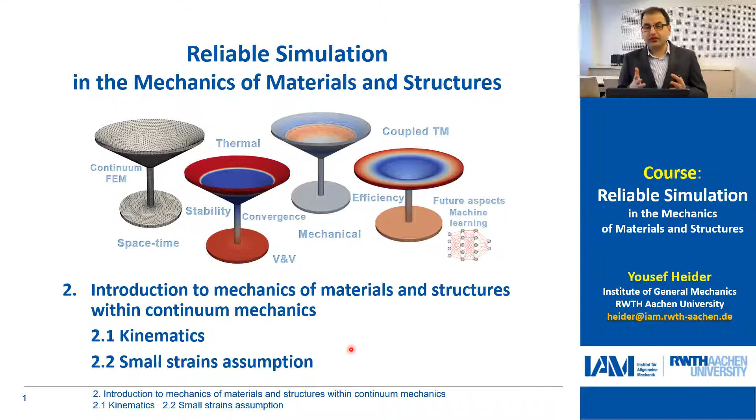Today we will talk about kinematics and the small strains assumption, and see its effect on the reliability of our numerical model.

Let me start with some general topics. In engineering, many problems can be modeled or treated on different scales. This depends on many factors, like what kind of materials we are dealing with, what kind of structure, how big the structure is, what computational capacity we have, and also our experience.

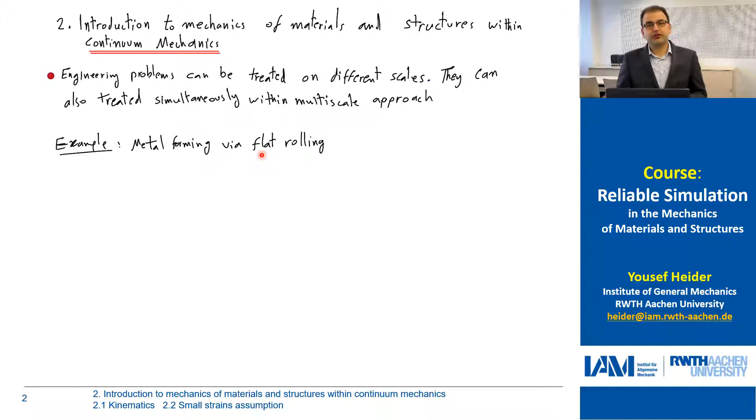Let's take, for instance, metal forming via flat rolling. In this example, we have a metal block or metal sheet subjected to rolling. If we look at this material on different scales, for instance at the atomic scale, we can see the atomic structure of this material.

We can model this problem on the nanoscale using molecular dynamics. However, this is almost impossible for large samples, maybe a few millimeters to a few centimeters, because then we have to deal with tens of millions of degrees of freedom, and even supercomputers cannot do these simulations efficiently.

Now if we move to a higher scale, for instance the micro scale, we have to consider the granular structure of our materials and the boundaries between these grains. Many researchers go for micro models because it gives very good results, close to the physics of the material.

However, it also has a problem with computational cost, because if we have a bigger problem, we have to deal with millions of grains, and this is not possible.

So if we have a sheet of metal or a problem with dimensions of a few centimeters to a few meters, we have to go for a higher scale, a continuum mechanical model, where we don't care about the micro or atomic structure of our materials, but deal with a homogenized medium.

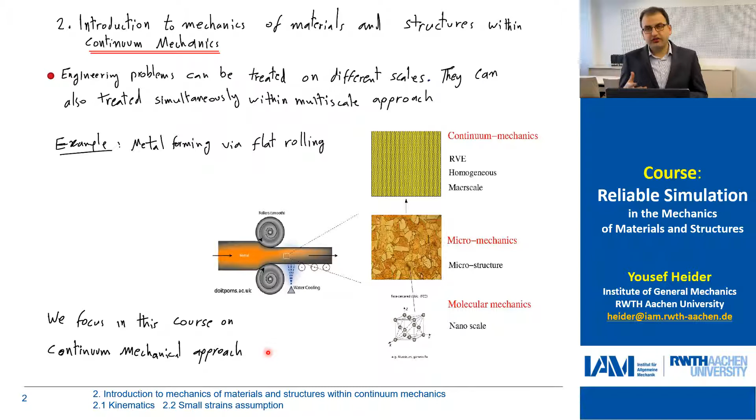In this course, we will focus on the continuum mechanical approach and the challenges and numerical aspects related to such models. So let me give you the basic notations, the way we write scalars, tensors, and so on.

If we see small letters like this one here, which have no underline and are not bold, they are scalar quantities. They could be material parameters, or any constants.

If we have vectors, vectorial quantities which are first order tensors, they have small letters with an underline below, and this is the vectorial quantity. If we have second order tensors like matrices of this form, we have the coefficients here, and here's a basis. In this case, these are second order tensors.

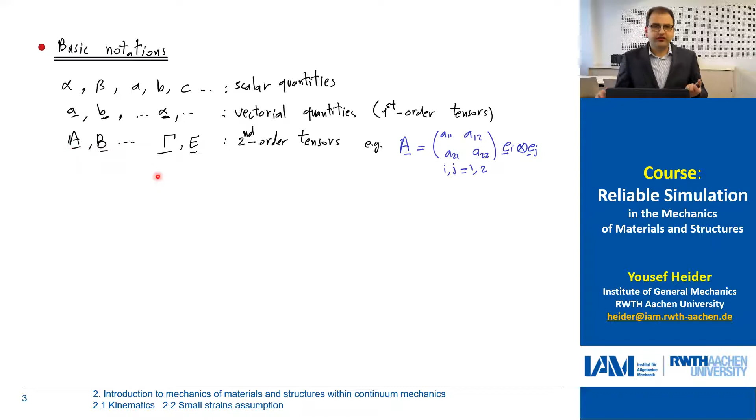For these kinds of tensorial quantities, we use capital letters with underline, and this is, as I said, second order. If we have higher order tensors, third order, fourth order, or even higher, we use capital letters with underline and write a number on top of the letter, which is the order of our tensor. So if n equals 4, for instance, this might be the elasticity tensor.

If n equals 2, then we have the second order tensor, so we don't write the 2 in this case, simply because most of the tensors we deal with are second order tensors, so we don't write it very often.

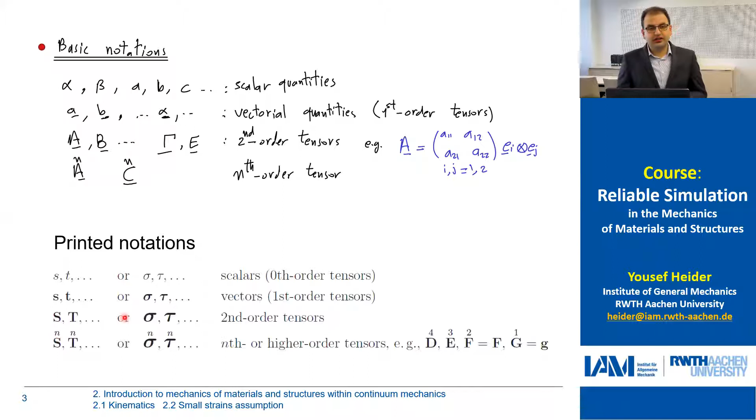If you take a printout or script from our group or institute, you will see these kinds of notations. The scalar quantity is similar to what we write by hand. For the vectorial or second order tensors, we don't write the underline, we use bold letters. This is possible on a computer, but by hand it would not be easy or possible.

So let's move on to the real topic. We will talk a little bit about kinematics. In this context, I am recalling some aspects you learned in the continuum mechanics course, and I will discuss different issues in connection with the reliability of the continuum model, which relies on these kinematic formulations.

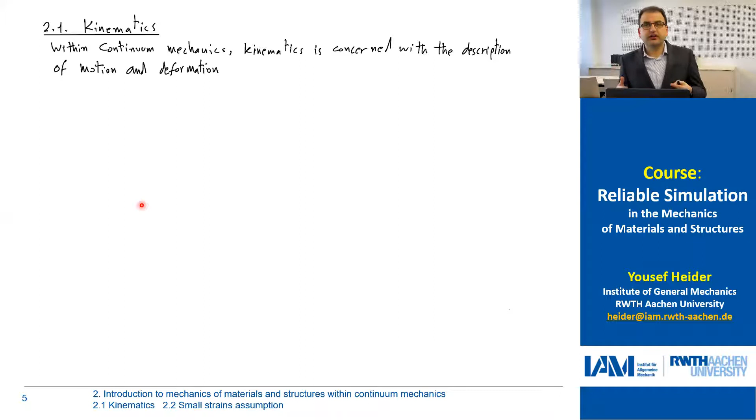We could have a line element, surface element, or volume element belonging to this reference configuration. And then after the deformation, so at time t, due to the application of F, we'll have rotations, we have translation, and we have deformation inside the material itself.

In this case, each material point P can follow its own motion function. We call this chi. It's a function of X, the position vector, and t, and it refers from the reference configuration to any current or deformed configuration, so that we have the position vector in the current configuration, which is small x.

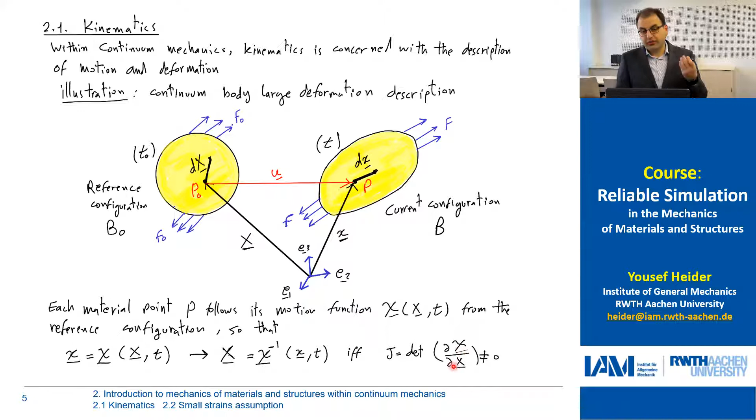It's a function of chi, and capital X is the position vector in the reference configuration. You can switch between the position vector in the current configuration and reference configuration through the inverse of chi. The Jacobian, the determinant of the partial derivative of chi with respect to capital X, should not equal 0. So small x and capital X refer to position vectors in the current and reference configurations, and these are our starting point.

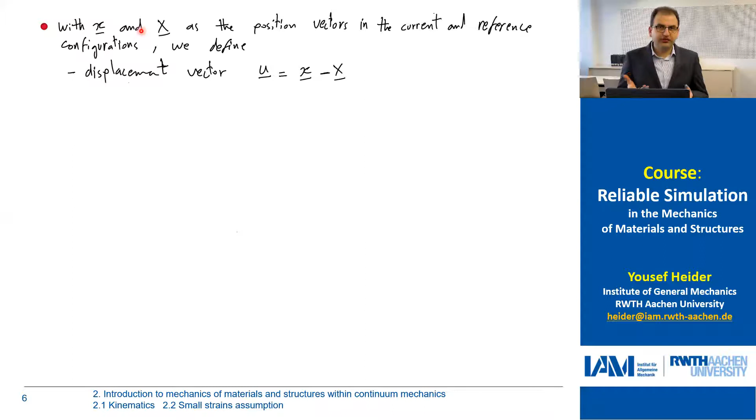Once we have this vector, we can define our displacement vector u, which is small x minus capital X. Then the velocity vector, which is the first time derivative, the partial derivative of u with respect to time. And then we have the acceleration vector, which is the second time derivative. These kinematic quantities will be needed later, for instance, to formulate the strain and the balance equations.

A very important and crucial quantity in the kinematic description is the material deformation gradient F. F can be defined as the partial derivative of small x with respect to capital X. And we have seen that small x is capital X plus displacement u. So by some reformulation, it will be identity plus gradient of u.

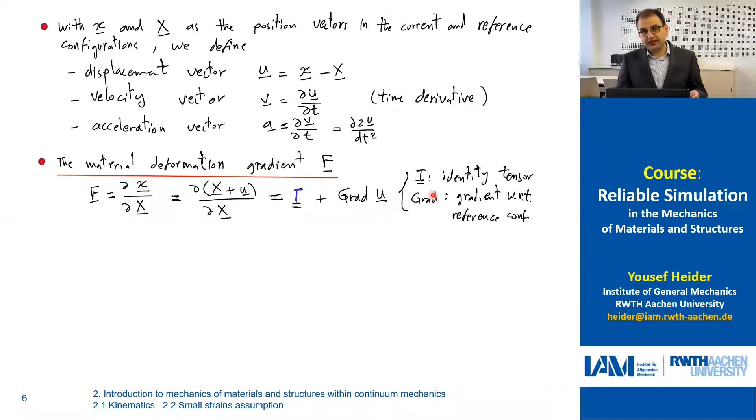I is the identity tensor, and this gradient has capital G because it refers to the reference configuration, so it's a gradient with respect to capital X. If we have another gradient with small g, referring to the current configuration, then we take small g. If we have an undeformed state, meaning u equals 0, apparently F would be equal to the identity tensor.

Now F includes all the information related to the rotation of our body, the transformation, and also the deformation inside the material itself. However, the rotations don't contribute to the strain. So if you have a certain body and just rotate it, rigid body rotation, there will be no strains or stresses inside this body. So we would like usually to get rid of these rotations in order to formulate our strain tensor.

Therefore, F can be split into a proper orthogonal rotation tensor R and a right or left stretch tensor, which includes the deformation inside the material. This right or material stretch tensor is called U because it refers to the reference configuration. And V is the left or spatial stretch tensor because it refers to the current configuration.

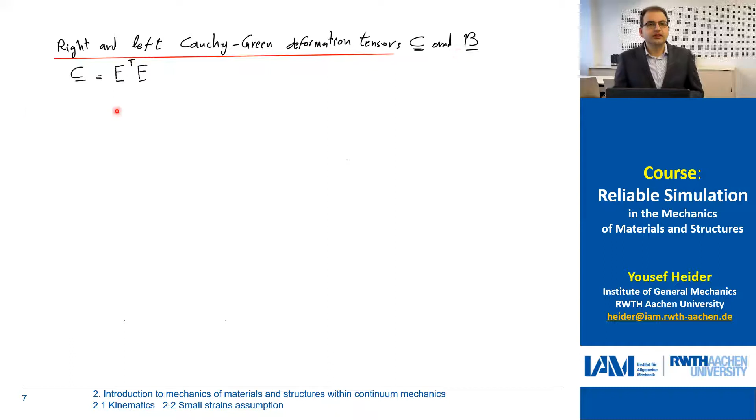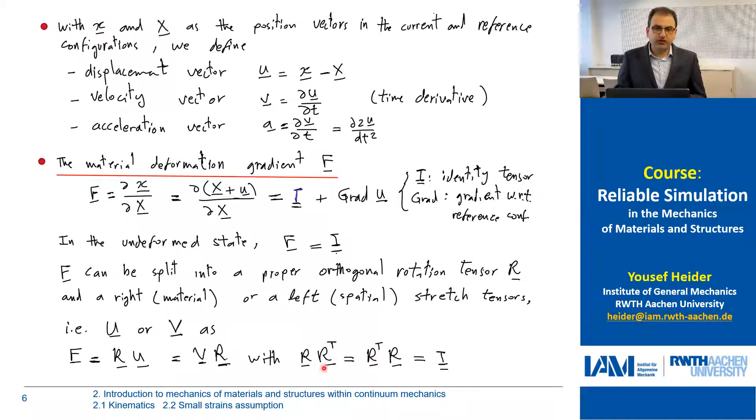First, let's go for the right and left Cauchy-Green deformation tensors C and B. C equals F transpose F, and we have seen that F transpose F will give us at some position R transpose R, or R transpose. So F transpose F would give us U multiplied by U because R will disappear here, and this equals U squared. This C, the right Cauchy-Green deformation tensor, is associated with the reference configuration.

The counterpart would be the left Cauchy-Green deformation tensor B, which is F F transpose in terms of V, and this is V squared, associated with the current configuration because it mainly includes the information of the current state of deformation, while the other one has information for the reference state. More details would be covered in the context of the continuum mechanics course, where we'll go into much more detail, but here I'm just recalling some information which will be used later.

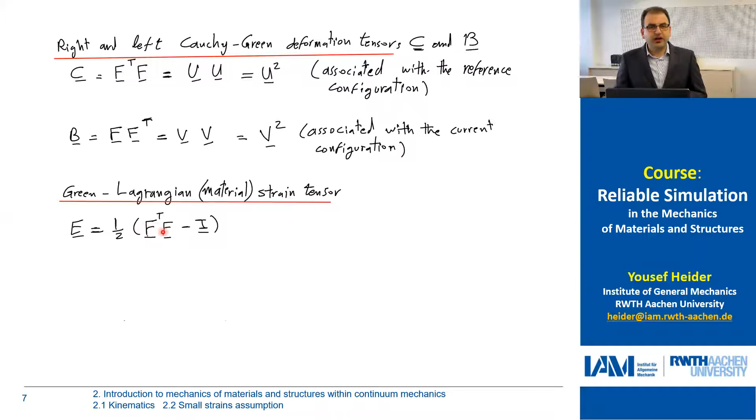As our aim in this discussion is to get the strain tensor, which is, for instance, the Green-Lagrangian or material strain tensor — as we write here material, it means it's referring to the reference configuration — the Green-Lagrangian strain tensor is written as E equals half multiplied by F transpose F minus identity. However, F transpose F, we have seen, is C, the right Cauchy-Green deformation tensor, and this is in the reference configuration because C is in the reference configuration.

The other strain quantity, which refers to the current configuration, is the Almansi, or spatial strain tensor, and it's defined in a somehow similar way. It's half multiplied by identity minus B inverse. As I said, it's in the current configuration. So these are strain quantities within the large deformation description. This is because we distinguish between the reference configuration and the current configuration, so the undeformed body and the deformed body in our formulation.

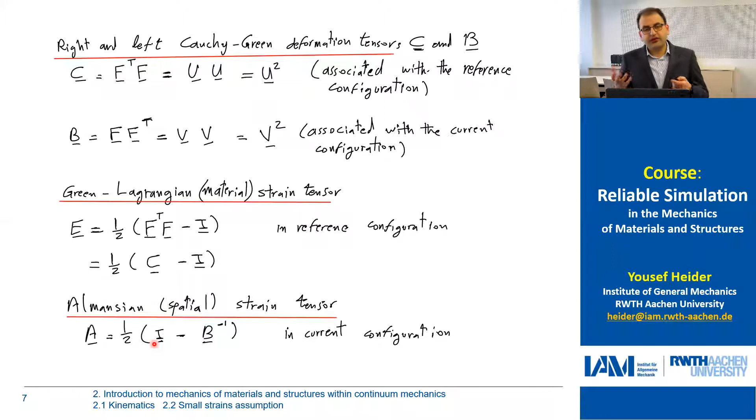And as you will see later, this includes nonlinear terms. For some special cases, it can be linearized to get the linearized strain tensor, and this is the next step. So we will go for the small strains assumption, as you'll see here.

Under the assumption that the deformations are small, the norm of the displacement, U is a vector, so in order to get a number and see it's small, we have to take the norm. This norm should be small. In this case, the gradient of U, or if we take the norm of the gradient of U, would be an even smaller value than U.

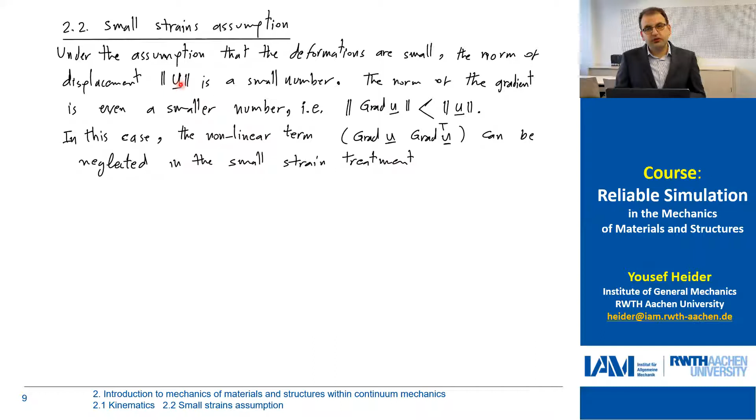And in the nonlinear strain formulation, we will get gradient U multiplied by gradient U transpose, and this is then a much smaller number, and this can be neglected. Remember, our starting point in this argument is that U is small. So if U is not small, then the whole argument will not be valid.

Just for illustration, assume that the norm of gradient of U is 10 to the power of minus 3. In this case, if we take the norm of gradient of U transpose multiplied together, it will give us an even smaller number, 10 to the minus 6. It's much smaller, so it could be negligible.

For instance, if the gradient of U gives us a higher value like 1, then if we take gradient U transpose, it would again be 1, which is a considerably large number, and we cannot neglect this.

Now, just to show where these terms show up, let's recall the definition of F. So F, as we talked about a few slides ago, was the identity plus the gradient of U. Now, if we take the transpose of F, the identity would be the same, and then we have gradient of U transpose. Now, if we plug this into the definition of the strain tensor, the Green-Lagrangian strain tensor, it will give us half multiplied by gradient of U plus gradient of U transpose plus gradient of U transpose gradient of U, and this is our nonlinear term, this one.

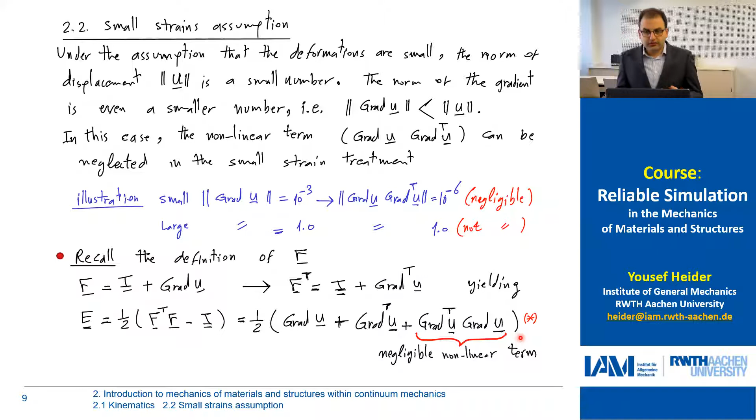Now, it would be negligible if we have small deformation, and this is the assumption that we'll proceed from.

So let's now summarize this. If we have linear or linearized strain, we simply linearize E, so we write E_lin equals epsilon equals half multiplied by gradient of U plus gradient of U transpose. And if we have a small strain, then we don't really distinguish between the reference configuration and the current configuration, so that's why we could write gradient of U in capital G or small g. It would not make any difference.

Notice that we call this equation double star, and the equation which was before in the previous slide, it's 1 star. So we are going to use these equations again in our later discussion.

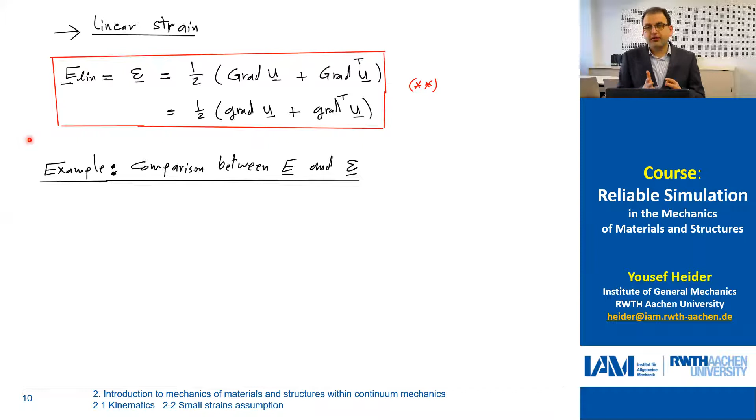Just to have more feeling about the importance of these nonlinear terms and the possible errors that could happen if we assume small strains in some improper way, we compare now between E and epsilon. Assume a very simple example: we have a bar here, a one-dimensional structure, which is constrained from the bottom, and we apply a load at the top of it.

Initially, this bar has a length of L0, and through elongation, the deformation, it will have a new length, which is L. Let's say the undeformed state is associated with T0, our reference configuration, and then after deformation, it's time T, so it's the current configuration.

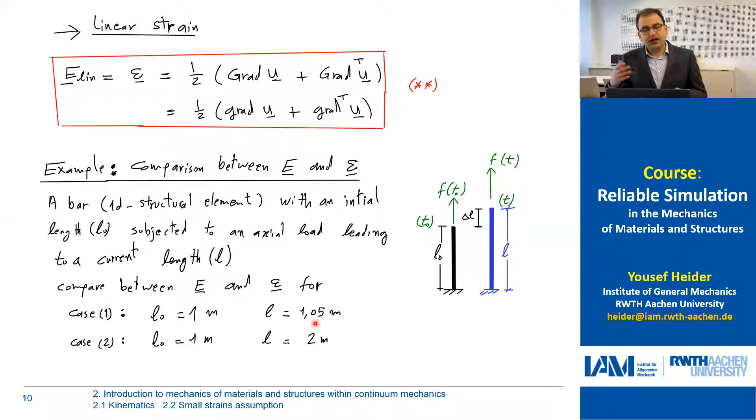And the task here is to compare between E and epsilon, so the Green-Lagrangian strain, which includes the nonlinear term, and epsilon, which is a linearized strain quantity. This comparison will be carried out for 2 cases. Assume that the length is 1 meter, and the length after elongation is 1.05, so we have 5 centimeter elongation. And for the second case, L0 is 1 meter, and after elongation it would be 2 meters.

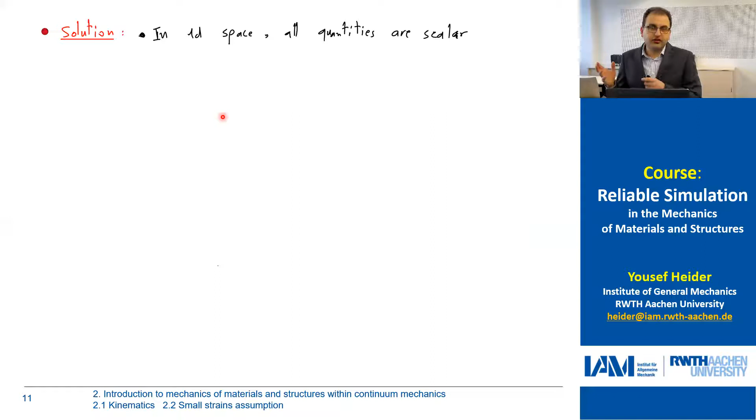So for the solution, of course, we have here a problem in one-dimensional space, so we don't really need to take care whether it's vectorial or tensorial. So all the quantities in this context would be scalar quantities, that's why we don't write the underline below the letters. So we drop this from all the following examples.

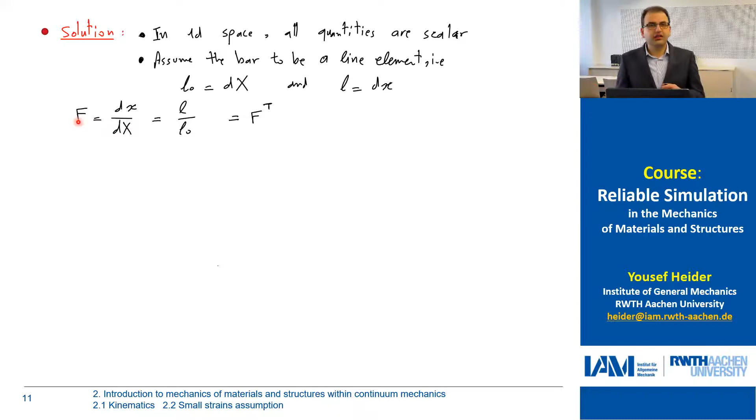And so assume the bar to be a line element. It means L0 would be d capital X, so our line element in the reference configuration, and L equals to d small x, which is our line element in the current configuration. Now we recall the definition of F, our deformation gradient, dx to d capital X, and then it will be L divided by L0, and this is also F transpose, so the transpose would be exactly the same.

Now, if we plug this information into both E and the linearized epsilon, the large and small strain, we see that E, the Green-Lagrangian strain, will be half multiplied by L squared minus L0 squared, divided by L0 squared. And epsilon would be L minus L0 divided by L0, which is delta L divided by L0. Epsilon is called the engineering strain, which is widely used.

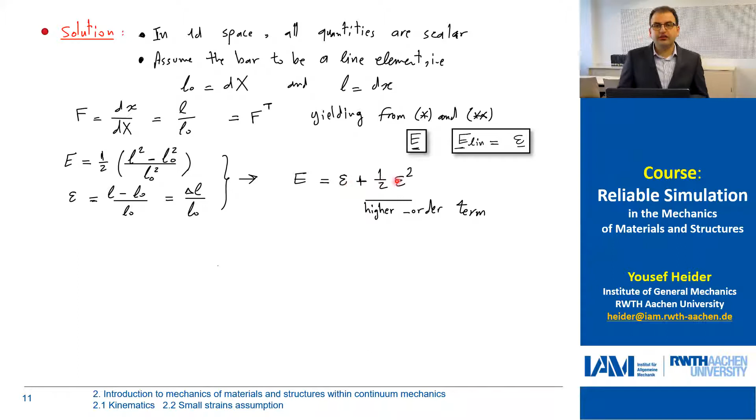If we reformulate this, we see that E, our Green-Lagrangian strain, includes the small strain epsilon, plus a nonlinear term, which is half epsilon squared. This is the higher order term, and this is what we usually neglect when we say our strain is linear, so we can simplify our formulation. If you want to consider this nonlinear term, it means your description is more accurate. However, it increases the computational demand to a large extent, so people prefer not to use this. It's just to increase the speed of computation that people go for this simplification assumption.

Now let's plug in the values of L and L0 to estimate the errors. For the first case, when L0 equals 1 meter and we have an elongation of 5 centimeters, we see that capital E and epsilon are very close to each other. The difference appears only after the third decimal number. If we compute the L1 error, we get an error of 2.44%, which is very small and negligible. So for this small deformation, we can use epsilon and accelerate our computation.

Now, if we take the second case, where initially the bar was 1 meter and became 2 meters afterward, we see that E is 1.5 and epsilon equals 1. In this case, the errors are really high. Using the error in the same way, we compute it to be 33%, which is a very high error. So if we go for an assumption of small strain in this case, we are making a big mistake. You should be very careful in this context.

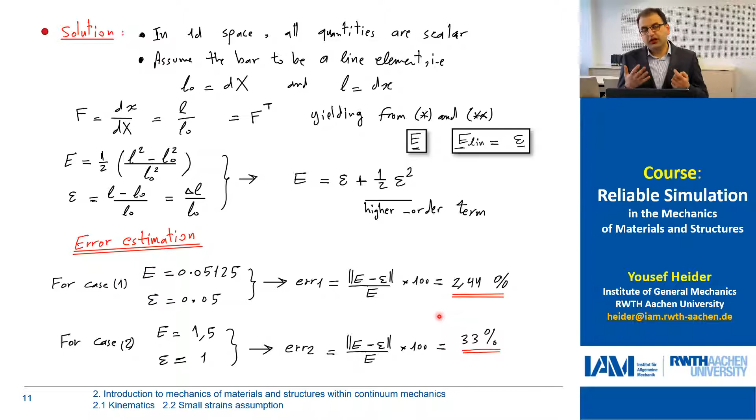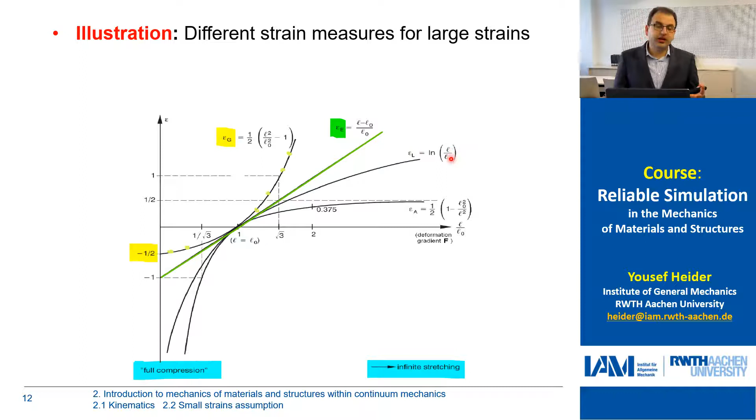Now, as an engineer, when you decide what kind of strain to use to solve a certain boundary value problem, you should be aware of what kind of deformations you have. If your deformations are small, let's say between 1 over square root of 3 to square root of 3, then we can use any of these strain quantities, it will not make a big difference. The x-axis here is our deformation gradient, and the y-axis is our strain measure. Maybe we'll go for the linearized strain because this will make our computation faster.

However, if we have large deformations, we have to look at the extreme state of the deformations. So if we go for infinite stretching, if you have a bar and you are stretching it to a very large extent, as the stretching goes to infinite values, this axis will go to the right. If the stretch is getting to infinity, your strain quantity should also capture this effect.

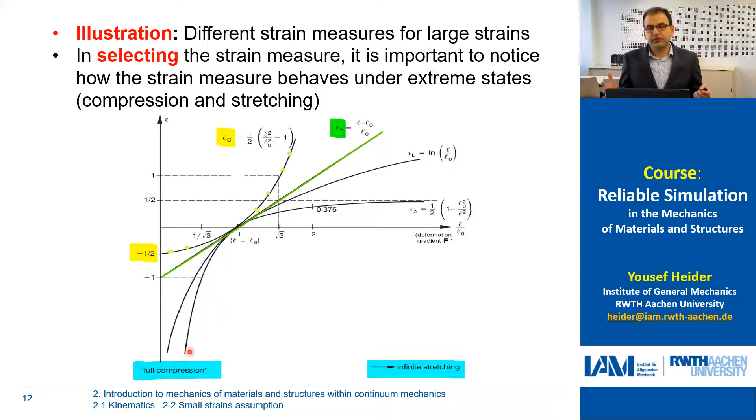If we go for full compression of a material, compressing it to a certain point, so F gets close to 0, some strain measures like the Green Lagrangian will end up at -½ and will not capture this full compression, because the strain should also converge to -∞ under infinite compression. The linearized strain has a minimum value of -1, but other strain quantities like the Almansi or logarithmic strain will capture this convergence to -∞, so they would be suitable in this case. It's important to understand the range of deformation when selecting the strain quantity.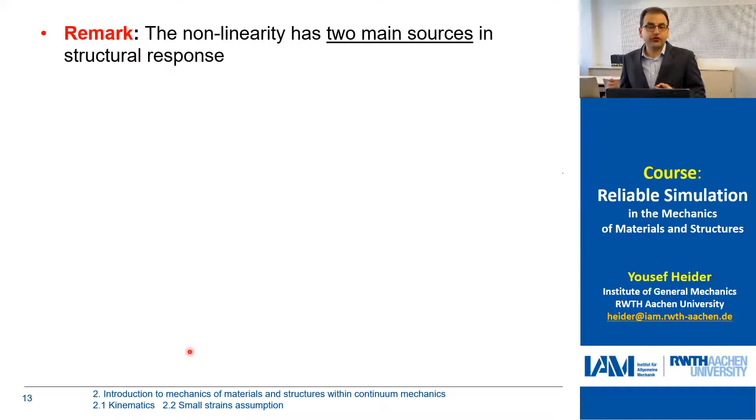The difference between small strains and large strains falls under geometrical nonlinear problems. But in solving initial boundary value problems, we have other sources of nonlinearity. Two main categories are material nonlinearity, about the relationship between strain and stress - linear elasticity means a straight line between epsilon and sigma, while nonlinearity means a polynomial shape, or for other deformation types like elasto-viscoplasticity we'd have other curves. The other kind is geometrical nonlinearity.

In this case, we have to capture the change of geometry and consider this in our mechanical formulation during computation. This is what we are dealing with in the context of large deformations.

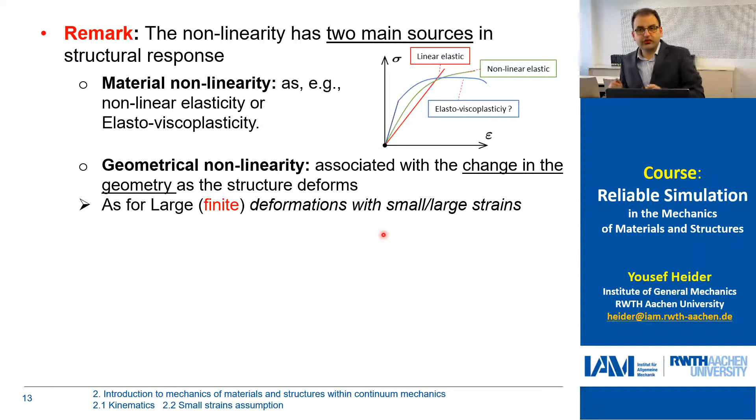For example, large or finite deformations could also be associated with small or large strains. So you could have large displacements but small strains. I will give an example of this.

If we assume a thin wall structure under pure bending, and we bend this, it's clear we can see large deformation - this point becomes here. However, if we measure the strains, or the maximum values of the strain for a point here, it will be t pi divided by l 2, for this pure bending.

If we consider our thin wall structure has a length of 500 centimeters, so 5 meters, and a thickness of 10 centimeters, then our strain measure will be 3%, so 0.03, much smaller than 1. This is a small strain. However, the deformation or displacements are high. In this case we have to go for finite strain theory in the kinematic formulation, and consider the deformed geometry during loading.

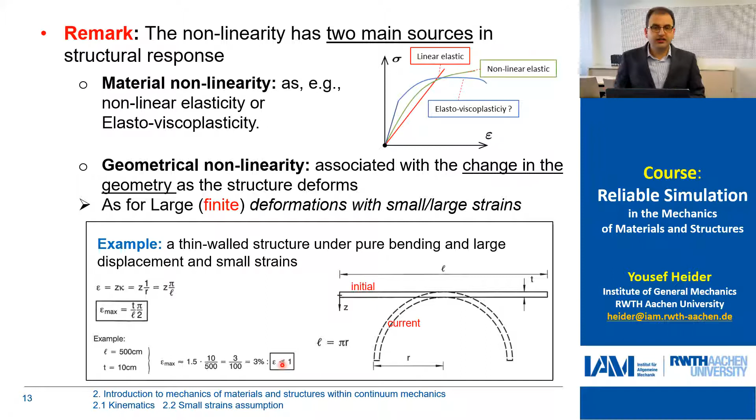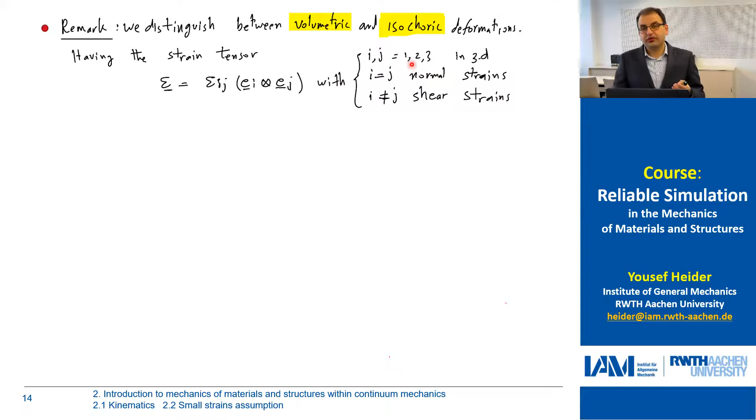A final remark for this video: it's important to distinguish between the volumetric and deviatoric part of our strain measure. I'm introducing this because we will need it later in our FlexPDE code and in the formulation of our strain tensor, maybe in the next lecture. So having this strain tensor as epsilon ij, with e i dyadic e j as our basis vector, in three-dimensional settings i and j change between 1 and 3. If i equals j, we have normal strains, as in this figure, and if i does not equal j, these are shear strains.

Now we can split the volumetric deformation, or the volumetric part of the strain, from the deviatoric or pure shear part. The volumetric part can be derived using the trace operator, E equals trace of epsilon, a scalar quantity - we simply sum the diagonal entries of our strain tensor, giving epsilon 1,1 plus epsilon 2,2 plus epsilon 3,3.